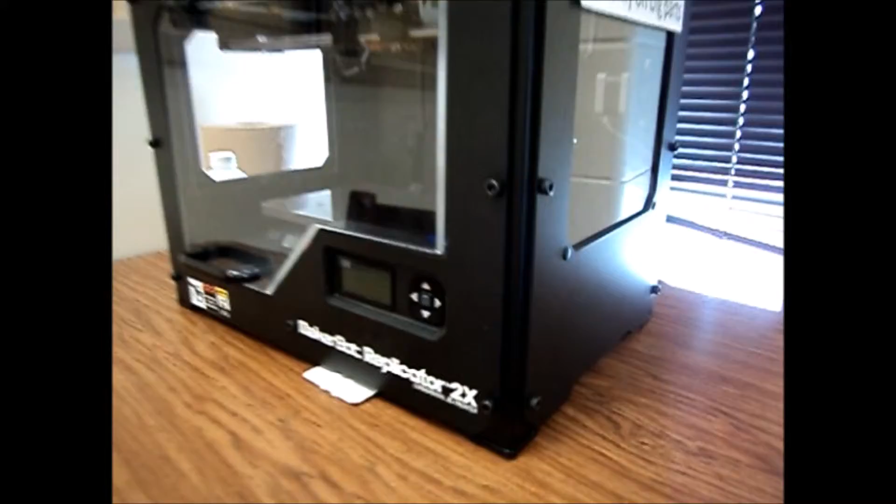Hey guys, today we're going to be learning how to 3D print. The first thing you're going to want to do is go over to the MakerBot and turn on the on switch located in the back right of the machine.

This is also a good time to check the plastic reels on the back too. Now you're going to want to go to the front and look at the arrow keys and the screen displayed. You should find a preheat button and you should use the arrow keys to scroll down to it and start the preheat on whichever extruder you plan on using.

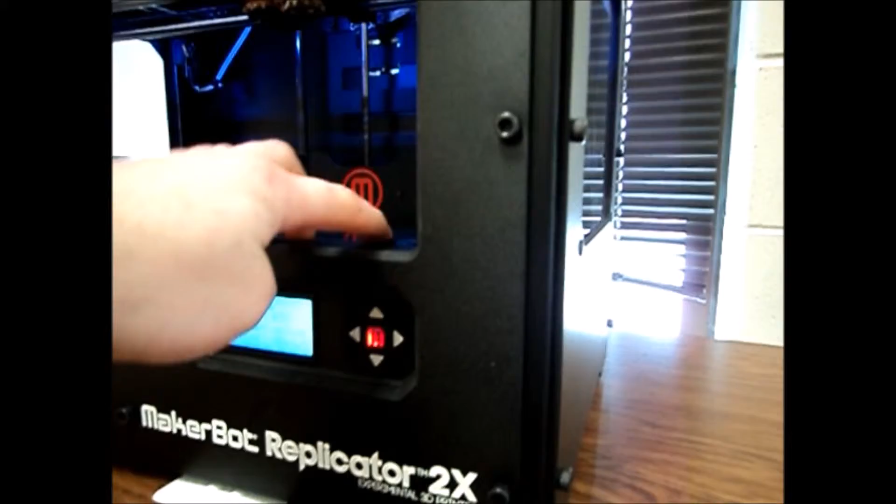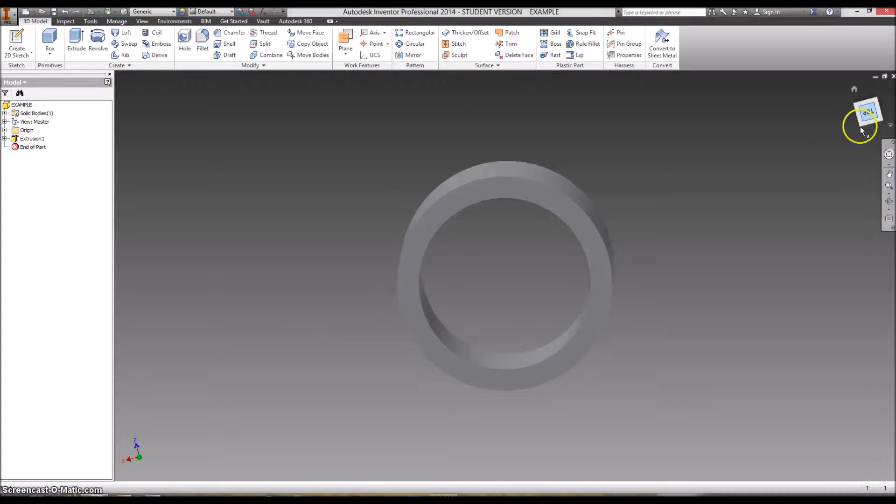Now open the front door and take out the SD card right above the screen and arrows. Place the SD card into your computer so you can save to it later. Now that you're on your PC, open the Inventor file, the part that you want to print. For this example and demonstration, we're just going to make a small cylinder.

Go to the top left corner, open the drop-down menu, go to Export, and export it as a CAD format. Once the window file shows up, you're going to want to change the file type to an STL file. Click Options, make sure that the units is in inches, not millimeters. This is so your part transfers as the right size.

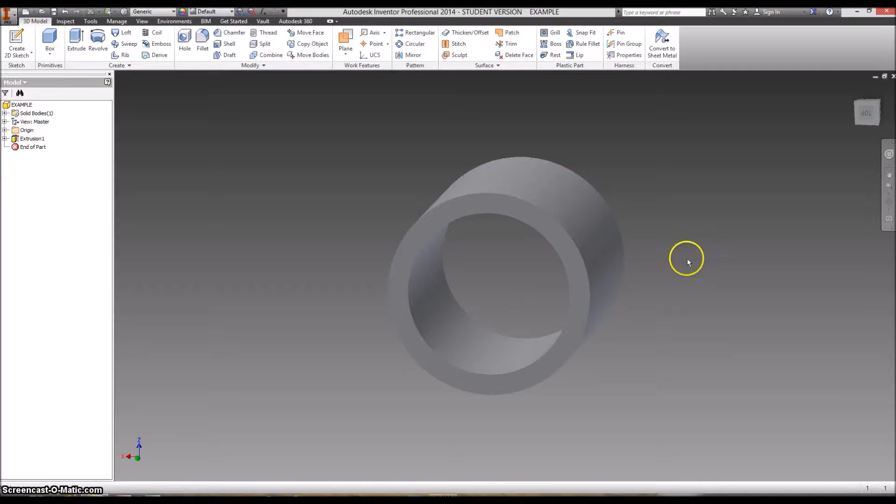Once you see the STL file created, you're going to want to open the program MakerWare. Once in MakerWare, the settings should be set up for the correct MakerBot. You're going to want to add that STL file that you just created. It'll ask you to resize the object and place it on the platform.

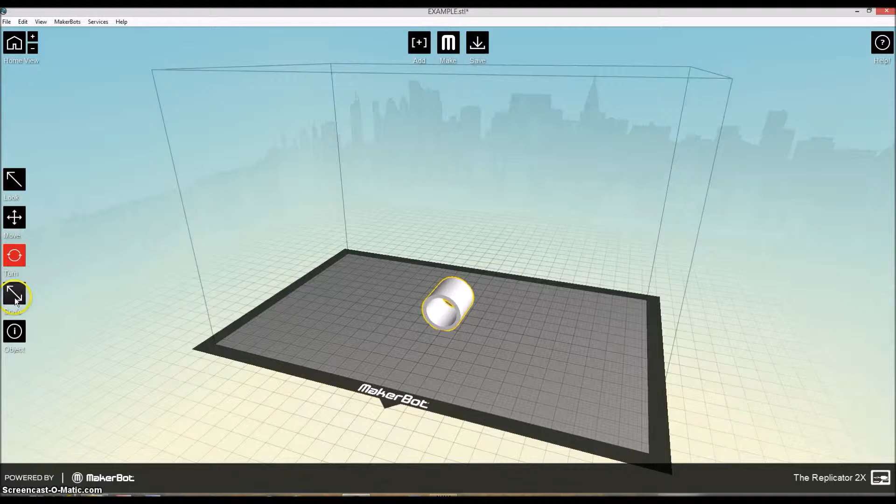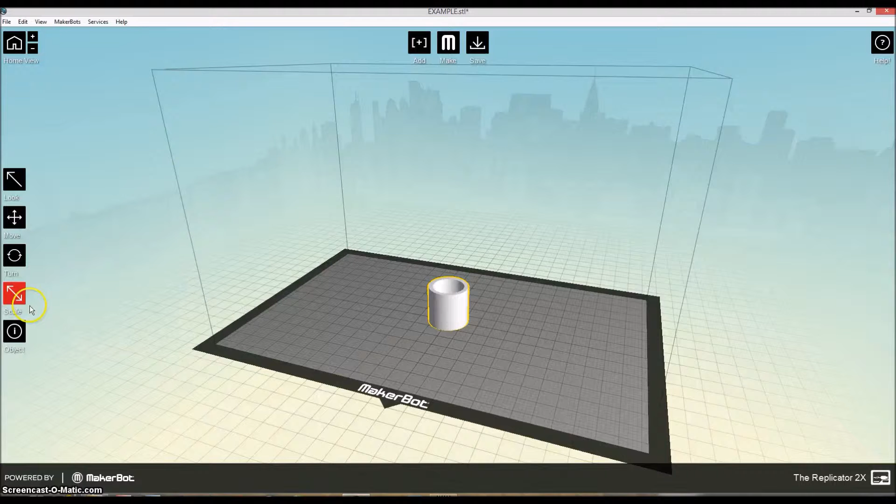Now on the left side of MakerWare, there's multiple tools to get everything to look just how you want it. We're just going to use the rotate feature so the part prints correctly. You always want to make sure that the part is laid flat on the build plate so the extruder doesn't touch the build plate. Now we preheated the left extruder, so we're going to click the left extruder on the object.

Now you click Make and change the settings to how you want it. Usually I use standard. Low would be used more for bigger parts, standard for standard parts, and high for really high detailed small parts. Raft is the base layer it prints before the part is actually made. Usually we just use the raft on bigger parts.

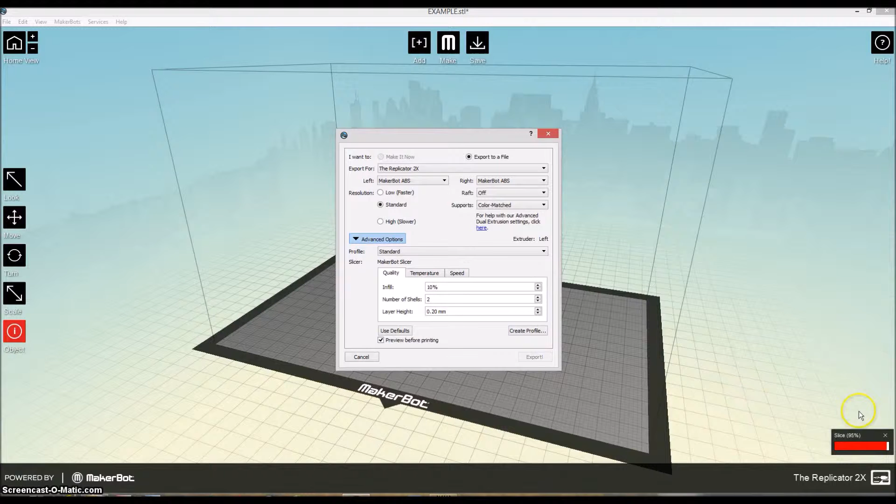And supports is if you have a part that's over top of an airspace, it can't print on nothing, so it makes like scaffolding for it to print on top of. Once you hit export, you're going to want to print preview. This will give you the estimated build time that your part is going to take.

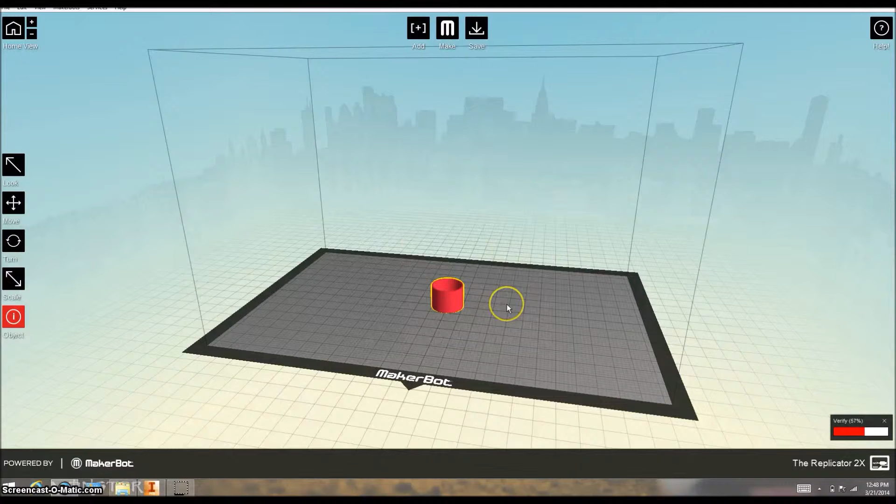Now it asks you to choose a file location. You're going to want to save onto the SD card that you took out of the MakerBot initially. Now that that's all taken care of, you're going to want to take the SD card out of your laptop or desktop and place it back into the MakerBot.

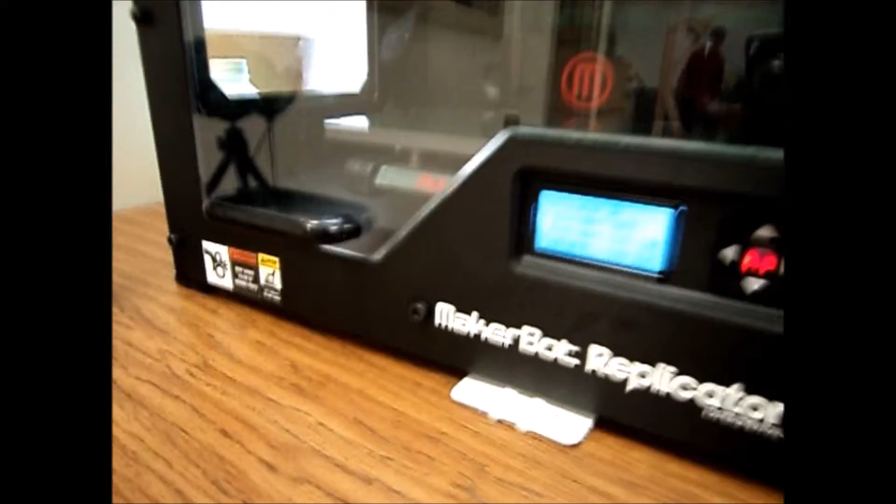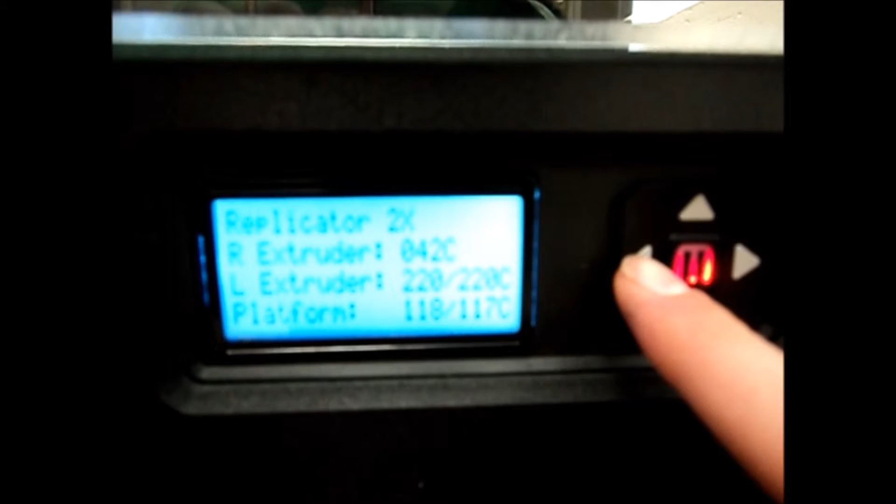Now you're going to want to look back at that initial screen that you used to preheat the MakerBot. Click the back arrow to go to the other device functions and click Build from SD. There may be multiple files on the SD card, so scroll down until you find the one that you created. And that's all you have to do for setting up the build file.

Once the part is completed, all you have to do is turn off the MakerBot using the switch located on the back right corner, and peel off any plastic located on the build plate.